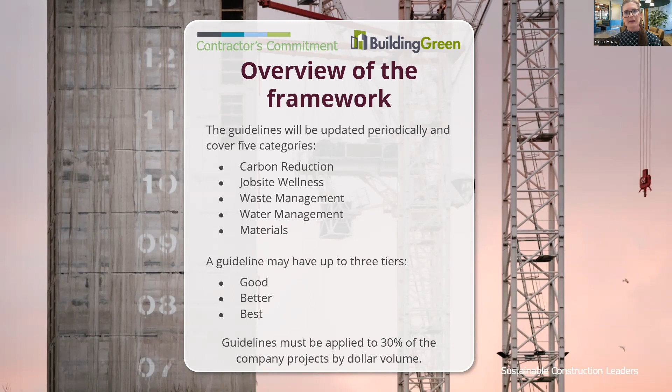So for the first category, carbon, the focus here is really the emissions from construction equipment during the building construction phase. Now I'd like to throw a pop quiz at you all. Let me just share the first poll here. Hopefully you should see a poll question in front of you: What percentage of annual global carbon dioxide emissions come from building materials and construction?

I'll wait a few more seconds. Okay, looks like we all got the answer. I see some 40% and some 11%. The actual correct answer there is 11%.

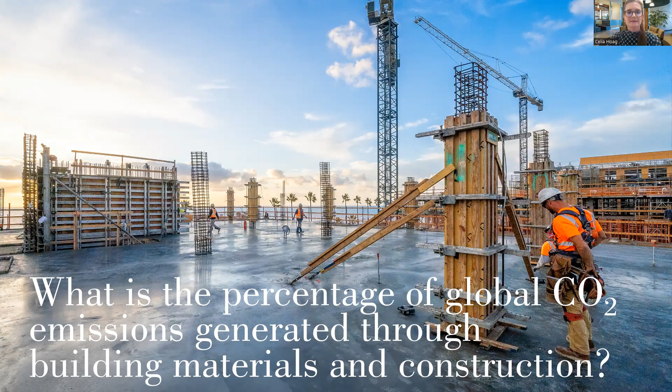So 40% of our global annual carbon dioxide emissions come from buildings, but 11% of that 40 is from building materials and construction, and 28% from building operations. And so it's not an insignificant percentage at all, and that's why we really need to focus on building materials and construction and the carbon and our emissions during that phase, as well as during building operations.

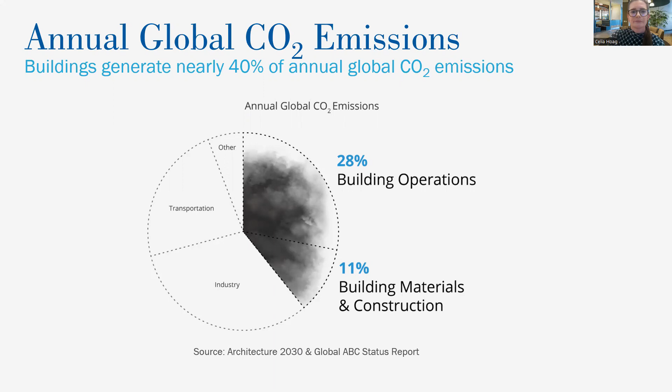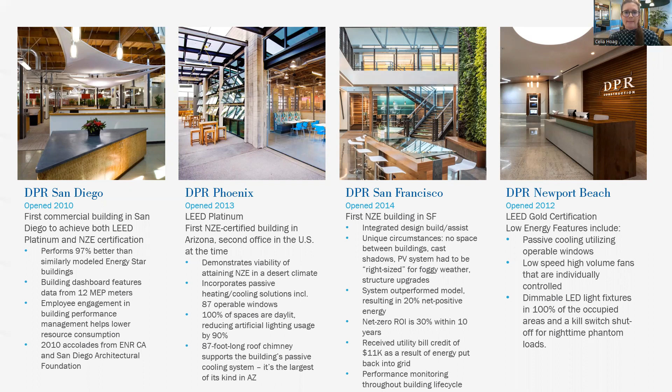So I wanted to just look at a couple of our newer offices that have just come online and joined our Living Labs portfolio. In our DPR Sacramento office that opened in 2019, we really tried to address embodied carbon in our building materials. And we did this through the addition of 6,000 square feet of mass timber to the building, using cross-laminated timber paneling for structure, which is the first shear application in the state and also the first CLT structure in the city.

The building itself is also targeting net positive energy, LEED Platinum and WELL certifications. The energy efficiency strategies incorporated will reduce the actual energy load by 45%. And then the solar panels on site are projected to yield 107% of that on-site energy. So we're looking at being net positive there once our performance period of measurement and verification has been completed.

So the benefit of using mass timber in this building and in construction is really that it takes less energy to produce, it sequesters carbon, and it is low embodied carbon over the life cycle of the building as a result. There's actually a really great YouTube video showing how these mass timber panels were put together for the Sacramento office. And I invite you all to take a look at that in your own time. It's really fascinating to see how it's all put together and the constructability of it.

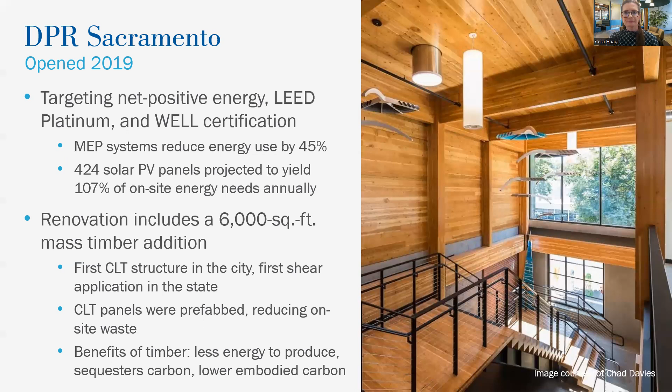Our newest living lab is actually in Raleigh-Durham, North Carolina, and it actually just opened this week. The total building square footage is 100,000 square feet. It's targeting zero energy performance through a combination of passive and active strategies, and it includes both a 35,000 square foot office space and also warehouse space.

So we have really high ceilings where we've really tried to take advantage of the natural daylight opportunities there through solar tubes, through reflective ceiling panels that also improve the acoustics in the space. We also have a 680 kilowatt solar array on the rooftop.

This building also focuses on promoting occupant health and wellness. It's looking at achieving a WELL certification as well as LEED and zero energy. I'll talk more about the amenity spaces that we try to incorporate in our buildings when I talk about job site wellness, but this building in particular has a yoga room, a fitness room, as well as a play area, in order to really promote occupant enjoyment and overall wellness in terms of their experience in the space.

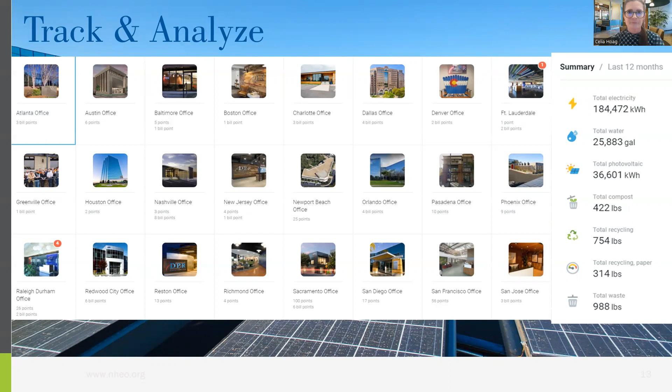We also have dashboards in our offices for educational purposes so that our employees and visitors can understand how the building operates, how the different components and systems interact, and the impact that an individual has on the total building energy consumption. It's been proven time and time again that knowledge is power. So providing this level of transparency to the occupants on energy consumption is really crucial to get their participation and their buy-in in terms of lowering energy and ultimately our carbon footprint.

So the next category is job site wellness. This category specifically addresses the wellness of laborers, as well as those working in the job site offices or trailers. When it comes to workplace wellness, what is most important to you? I'd like to see what you all think. I'm going to launch my second poll. When it comes to your health and wellness in the workplace, looking at these five, what do you think is the most important? Let me just launch this poll.

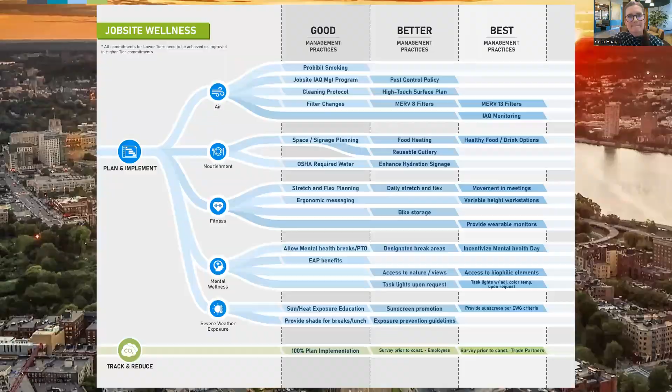We also provide a number of different mental health programs and resources, for example, direct talk and text therapy services. During COVID, we started a financial assistance and benefits program for our employees in need. And being a contractor, safety is really a core part of our business practices and operation. It is integrated early into our planning process to maintain a high level of safety standard, quality, and schedule, and making sure that all our teams and trade partners feel connected and supported.

We also have, as I mentioned earlier, daily stretch and flex exercises actually scheduled into our crafts' daily schedules, so they can prioritize these on our job sites with the manual labor that they do all day long. And finally, as we build out our living lab portfolio, we understand the importance of combining building science and medical science to create this measurable, healthy environment. Books like The Healthy Workplace Nudge provide examples of how organizations can accomplish this.

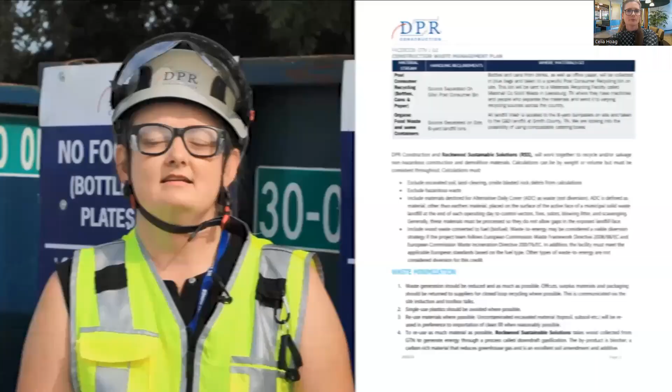Hi everybody, here we are at GTN. Historically, construction waste has been a big problem because a lot of the materials end up going to a landfill. But here on our site, we're really fortunate to work with a great group of people and have a partnership with a wonderful local hauler to take most of our materials to be recycled instead of going into a landfill. From the beginning of this project, we worked directly with the owner to come up with a really aggressive recycling plan. We have two different types of waste streams for construction and demolition debris.

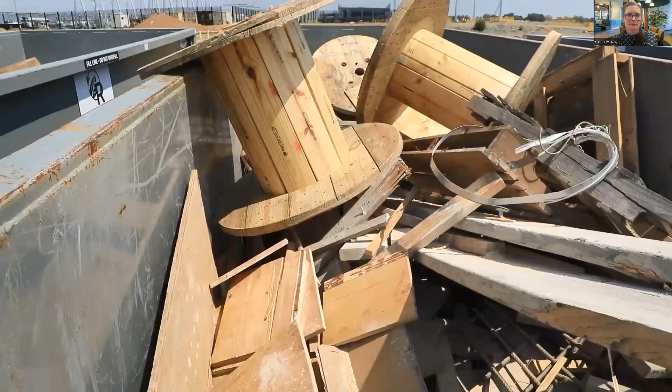The first type is our construction and demolition waste stream, which is building materials such as concrete, metal, wood, etc. The second type of waste stream is our post-consumer trash and recycling, which are things like cans, bottles, office paper, cardboard, anything taken from an eating area or our office trailers. Both types of waste streams are measured and recorded, but they're handled a little bit differently.

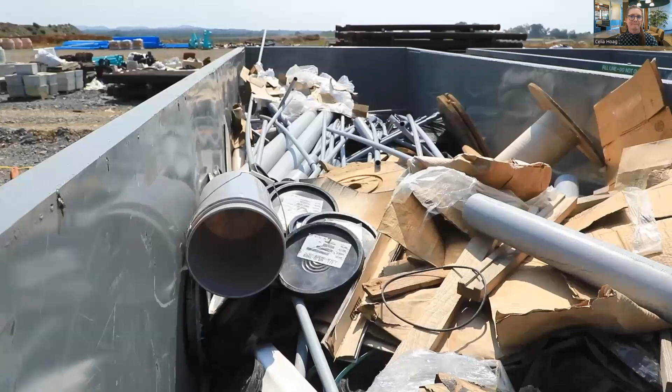Each dumpster has a sign that lists the materials that can go inside. There's also a sign that indicates that no food waste is allowed in these dumpsters. All of the signs are in two languages, English and Spanish. We work directly with our haulers to make sure the materials are funneled to the appropriate dumpster. Some materials can be combined together, such as cardboard and wood, where other materials need to be source separated, like concrete and metal.

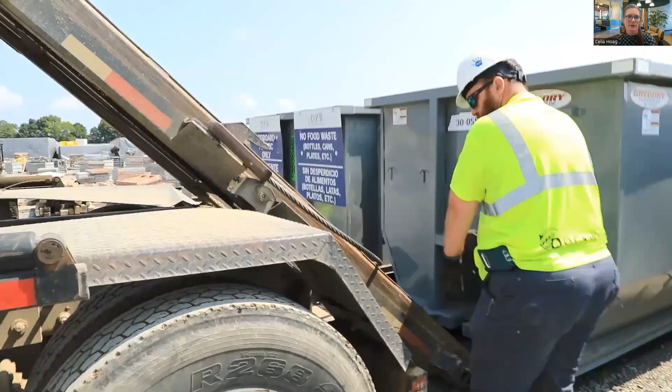This is determined by where the materials end up going and how they're being reused in the future. Once the material leaves our site, it is taken back to their facility where it is weighed and manually sorted. The recycled materials are either then used at that facility or they're taken to another facility for reuse.

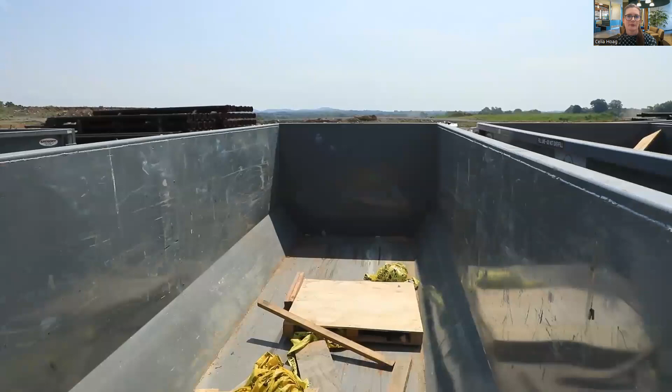The wood taken from our site is used to create a byproduct through the process of downdraft gasification. The byproduct is a biochar, which is a carbon-rich element. This material is used by farmers to amend their soils.

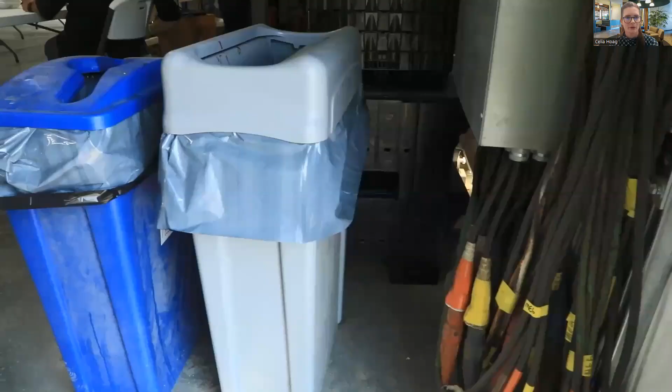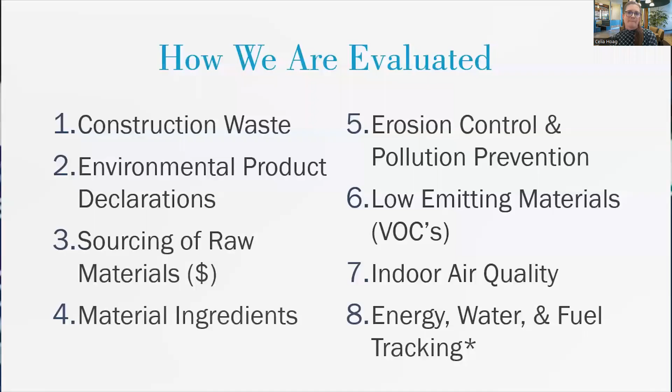We are actively trying to reduce the amount of material taken to landfill by emphasizing the importance of recycling on our facility and the use of signs and training. So as trade partners are brought onto our site, we have an onboarding session where we go over the different rules and regulations that govern our site. Part of this onboarding session is a whole section dedicated to recycling and the importance of making sure the materials are separated correctly and that materials are disposed of in the correct manner.

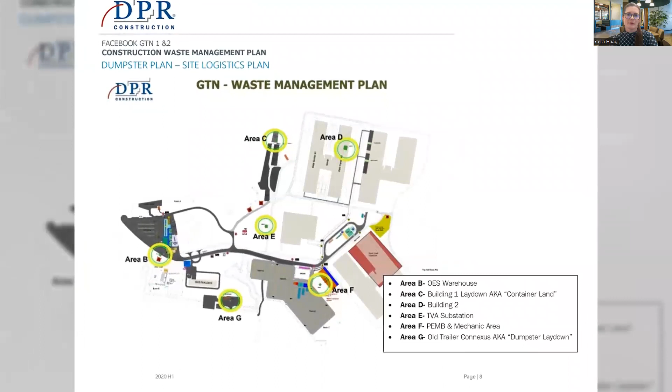We have a written document called our Waste Management Plan, which is a formal document that basically summarizes the whole plan on site of how we dispose of materials. This document is saved on our system so that anyone with access to our project files can access the plan and understand what we're trying to achieve.

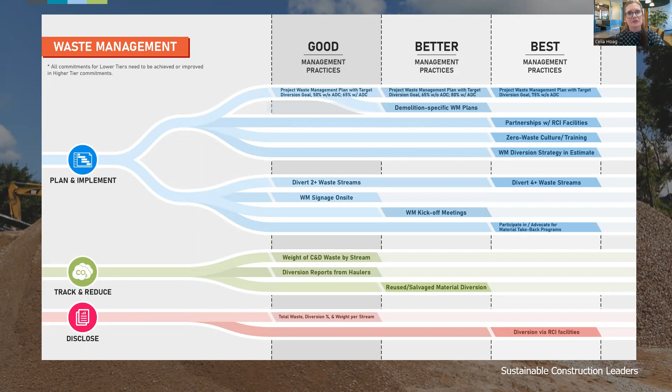So when it comes to the management practices in this framework, a lot were already covered in that video. But looking at a tiered approach here from good management practices all through to best management practices, which is to achieve this zero waste culture and 75% diversion from the landfill. And so as Jennifer in the video mentioned, planning for this is a really crucial component in order to make sure that everyone involved on the job site understands the goal.

We have resources in place that help our project teams with this, which includes a construction and demolition waste management plan that can be customized on each project. And this is a really critical piece to sit down with all your key stakeholders in achieving your waste goal. And that would be your haulers, your job site teams, your trade partners.

And so this plan, you might be familiar with, is required for LEED. A version of it is required for our REACH code, Cal Green. And so we try to get every project to at least fill out this plan, regardless of what the actual diversion goal is on their project.

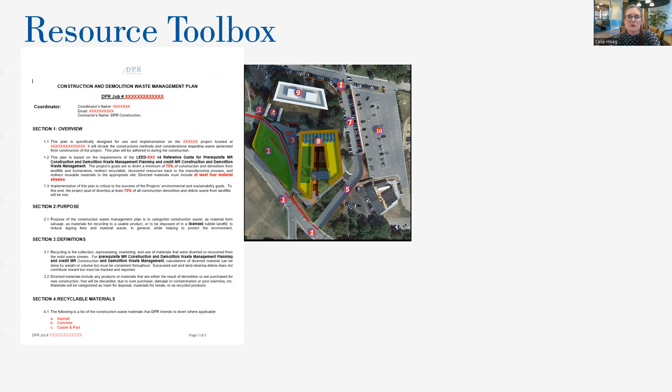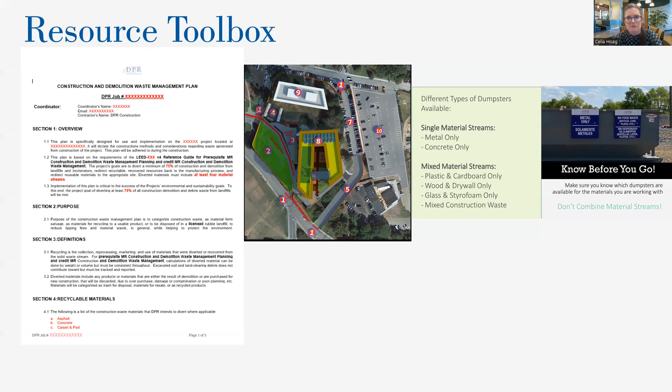The site plan will include a dumpster location map where these waste management stations that were talked about in the video are identified, and making sure that the signage for those is clear and bilingual for these single source and mixed source waste streams on site. And it's really important that this signage is there in order for us to have the support and cooperation from our trade partners and job site teams to know what material goes into what dumpster and the impact that it has on the back end, which provides this behavioral change, right? And really starts to gain their participation and cooperation on site.

And so talking about education, we've started to put a lot of emphasis on the importance of not only including the training and education on the waste management strategies on site at the onboarding meeting, which is a kickoff meeting for the construction phase, but also continually through our toolbox talks, which occur on a monthly basis. And we really wanted to drive this behavior change through this education and making sure they're all aware of why we're doing this in the first place and why we're trying to divert from the landfill.

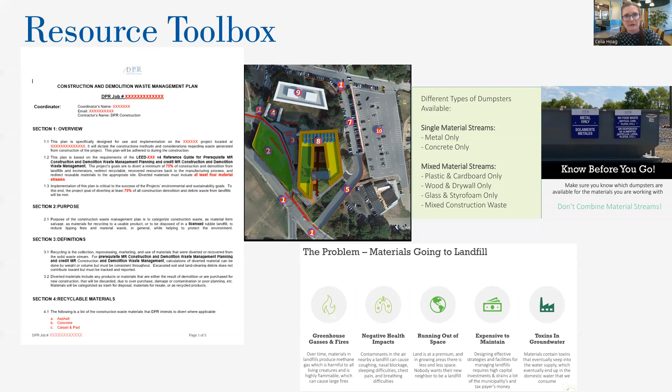What we have found is that most people actually want to do the right thing on site. They just don't know exactly what that is. So that's also a critical piece here, to make sure they have that education and that the signage is there to clearly identify what the requirements are.

So as part of the contractor's commitment, there's also an annual reporting tool for waste. And this is where we can consolidate our numbers on the individual projects and report out as a company. And again, this is the accountability, right? And making sure that we actually walk the talk. So this is something we're going to do in the next couple of years, is to really start to report out on our waste as a company, because it has such a huge impact in all of our operations.

So water management is another priority when it comes to our sustainability commitment. And it is something we so easily, I think, take for granted here. And certainly being from Australia, which I'm not sure if you all knew, but I actually grew up in Australia, I understand the importance of water conservation, as certainly being surrounded by water down there.

And I really like this quote from Maude Barlow, the chairperson at the Council of Canadians: We need a new water ethic that puts water at the center of all policy and everything we do. We must always ask the question, what is the impact of this policy or practice on water? If it is negative, we must drop it or amend it accordingly. Water is not a resource for our convenience and profit, but the essential element in living ecosystem upon which we all depend.

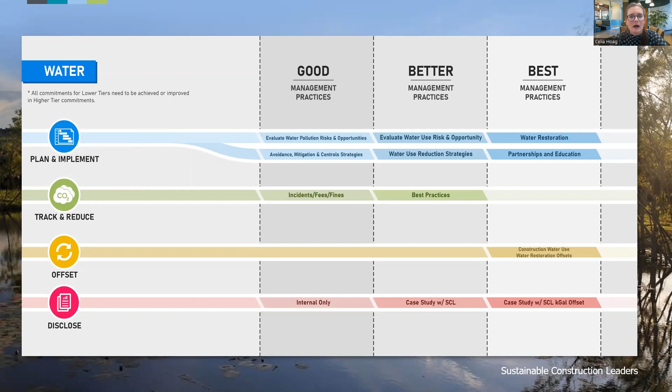I did want to share the following about our reclamation center that we have installed on the East Coast in one of our projects. So at this project in Virginia, it's a concrete washout reclamation center, and they're reclaiming the wastewater from the concrete truck and equipment washout on site, treating it, and then reusing this for dust control. So 13,500 gallons of recycled water is reused in one day through this system. That's an estimated 2 million gallons of water to be saved over the life of the project.

This is also paired with rainwater capture and treatment, and there is absolutely no potable water used during this process. So we're really proud of this and really hope to roll this out on more projects in order to be more conscious and prioritize water management during construction.

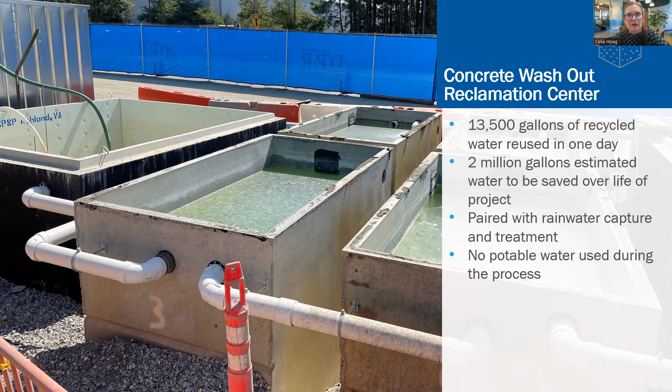Okay, materials. This is another huge category, right? And talking about sustainable material selection. At DPR, we firmly believe that recycling should be our last resort, and it's about sustainable material use. So first we want to reduce, then we reuse, and finally recycle.

So our last quiz of the day. Plastics are the largest, most harmful, and most persistent fraction of marine litter. What percentage of the total marine waste do you think plastics make up? While you're answering, I'll check. We've got very knowledgeable people today on plastics. I'm going to end this poll. So those who guessed 85% are correct. 85% of the total marine waste is due to plastic waste.

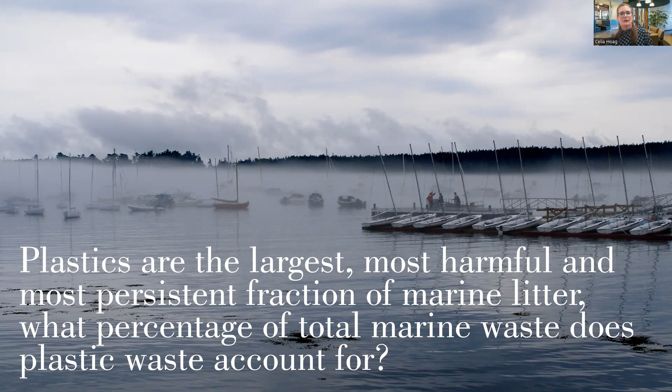And as a contractor, we obviously have a lot to do with this, and it's something we're very focused on within this framework, implementing some management practices on the material side of things to make more sustainable and responsible decisions. So each contractor is really asked to develop a healthy and sustainable materials policy. And if we continue to drive transparency in the materials we are selecting, we will have better visibility into how they are made and the type of impact that they have on the environment and human health.

And so it's really important for us to not only educate everyone on this, but also track our progress along the way, making sure we have HPDs, EPDs with all the data available to do that full analysis. And we see that as being critical in the selection of responsible building materials.

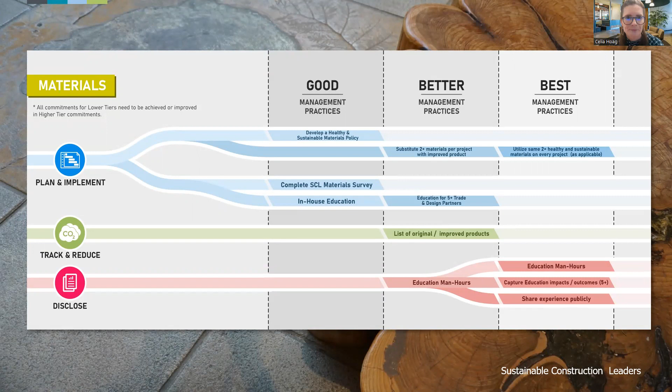So at DPR, we do have educational materials, both internally and externally. We're really excited to talk about mass timber, and I shared earlier about the Sacramento office. So that addition, which is 6,000 square feet, the CLT application used in that project sequesters 55 metric tons of carbon dioxide, which is equal to taking 33 cars off the road. And imagining if that's applied at a greater scale to our world building stock, that's equal to 70 million cars. So it really can have a huge impact.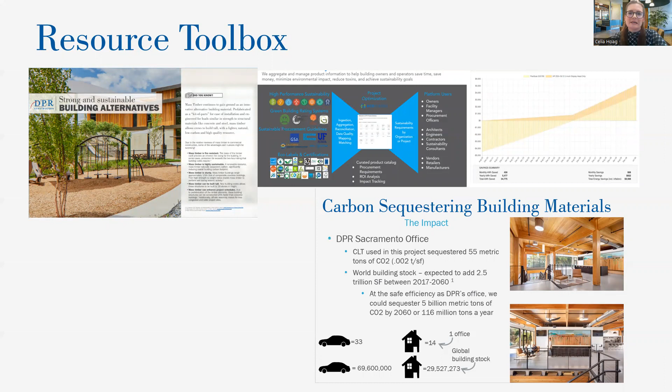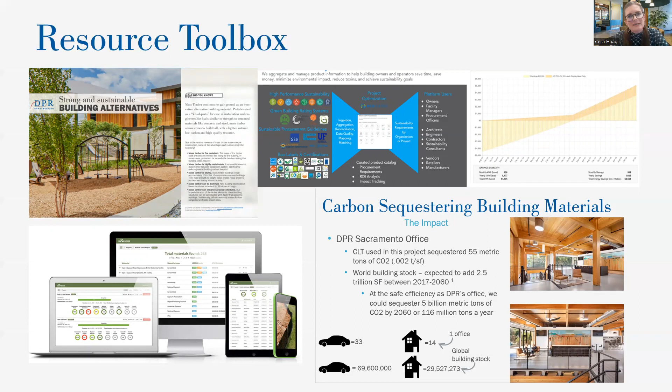And so we're really making sure we have tools and resources to dive into the material analytics, which is critical to success here. So on top of using programs like EC3, we also use a platform called Ecomedes that can provide this research for you for over 700,000 products and materials. We also use Green Badger as a platform to track our performance when it comes to materials and compliance with certifications, which also includes waste management and indoor air quality.

So overall, now that we've gone through each of these categories, I wanted to talk about and share how we've applied this contractor's commitment framework with our own sustainability best practices for job sites and offices. We've developed these best practices that project teams can use and apply for their projects. They include a good, better, best tier in each of those categories so that you can see the best management practices necessary to achieve each of the performances in that category.

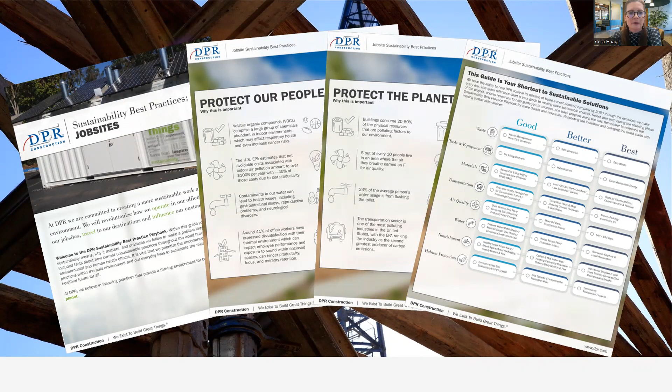Here's another slide showing the breakdown of each of those subcategories and the different components. It's almost like a playbook that you can apply and work through with different tasks and resources in order to implement it successfully on your project.

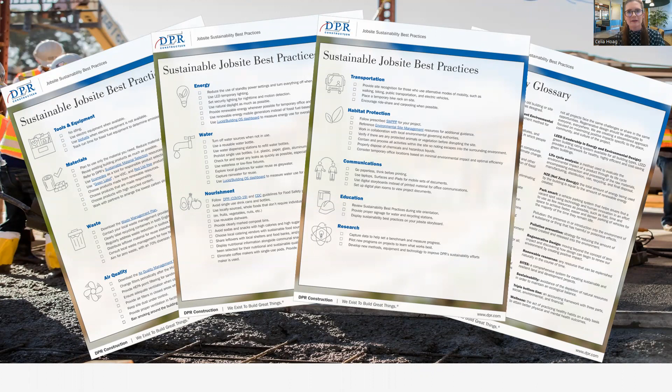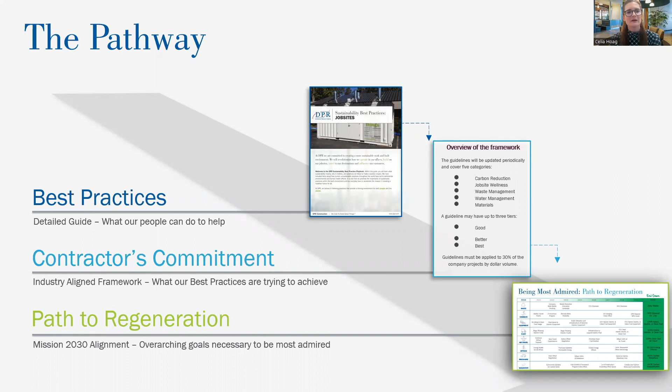Our pathway for success starts with our Mission 2030 alignment, and our overarching goals to be the most admired and our path to regeneration. That is our vision. We've then aligned this contractor's commitment framework with what our best practices are trying to achieve, and that's our strategy. Our tactics on how we get there are our best practices, detailed guides on what our people can do to help. And it's not just for us to use internally. We plan to use them externally on our projects and help our design partners and owners make these decisions.

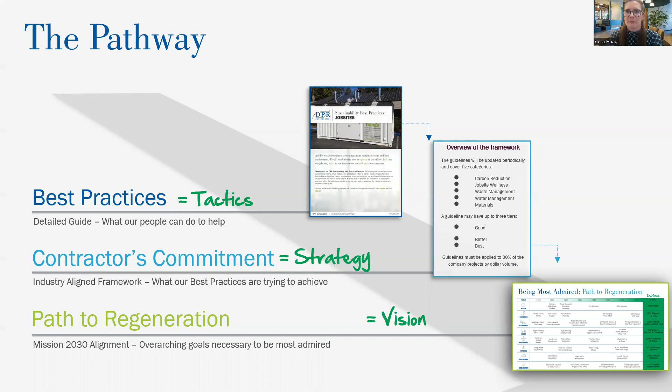So how can you use the contractor's commitment to advance sustainability if you are not a contractor? I think the first step would be to ask if your contractor has heard of it. What we would love to see is our trade partners participate and use this framework so we can share knowledge and ideas and raise the bar for innovation and emerging technology. You can ask your contractors to follow some of the measures or recommend one of the tiers of good, better, best. Just start somewhere in the framework to help drive those decisions early on in the project.

We obviously have to work together as an industry to be successful in this and hold ourselves accountable for the impact we have on the planet as contractors, and continue to do better where we can. So next steps would be asking contractors to consider signing on. If they are interested, you can include it in your RFPs and your specifications, and really help push the envelope when it comes to driving industry change and minimizing the impact that we have on the built environment.